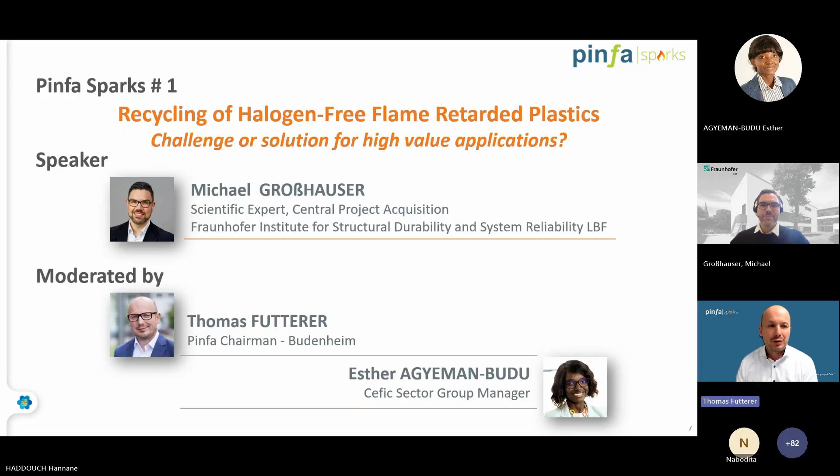Before we start, let me give you a short introduction to Pinfa. Who are we? We are the Phosphorus Inorganic and Nitrogen Flame Retardants Association, established in 2009 as a sector group within CEFIC. This association represents 26 members, including manufacturers and users of non-halogenated flame retardants. We also have Pinfa North America and Pinfa China as sister associations, and a global network of institutions and companies who support Pinfa and the members.

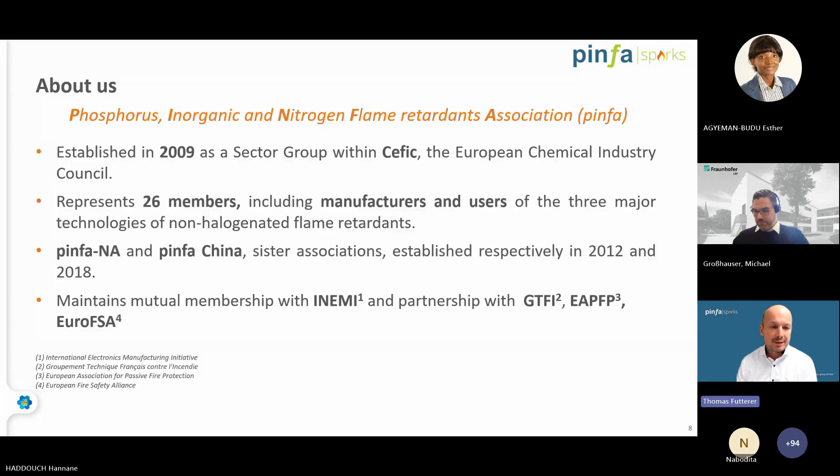We at Pinfa represent the phosphorus, inorganic and nitrogen-based technologies which enhance fire safety in materials and plastics. That's the topic today: plastics, but also textiles, foams, and electronics. These flame retardants contribute to reducing flammability and lead to a slowing ignition process.

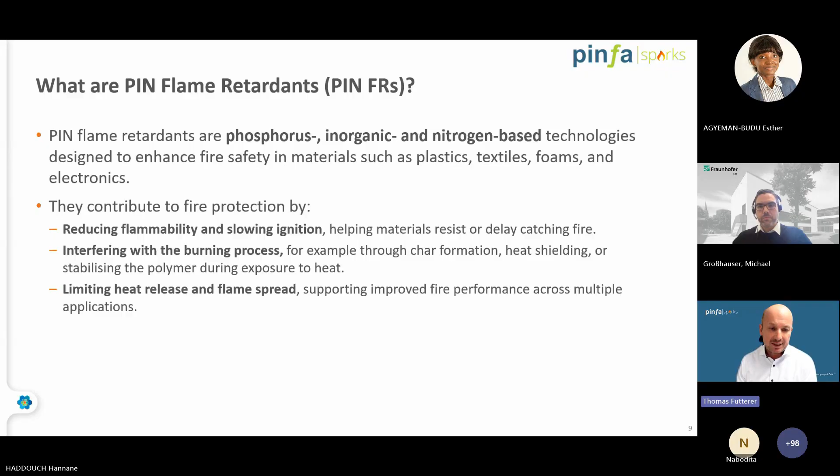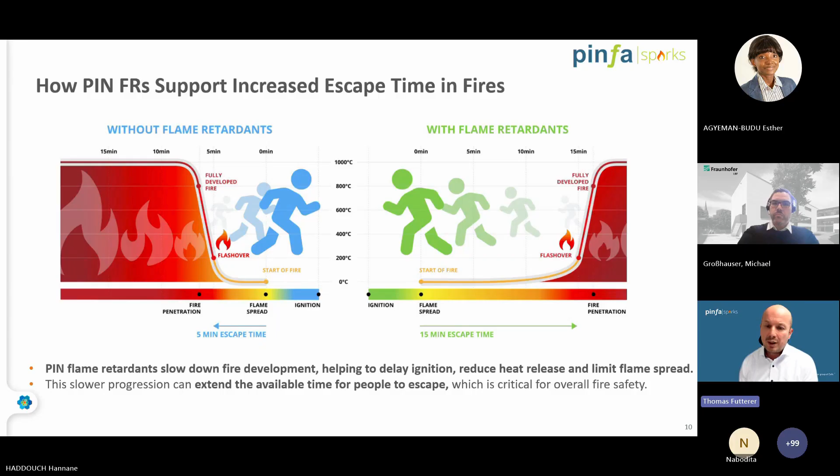Here you see the contribution of flame retardants on the right part of this scheme. With flame retardants, you gain more time for firemen, time for escape, time until the fire develops fully. So with this functionality in materials, you are able to save lives and goods.

What are our members' shared visions? The vision is to continuously improve the environmental and health profile of our flame retardant products, offering innovative solutions for sustainable fire safety. We are committed to maintaining high fire safety standards across the world and minimizing the risk of fire to the general public.

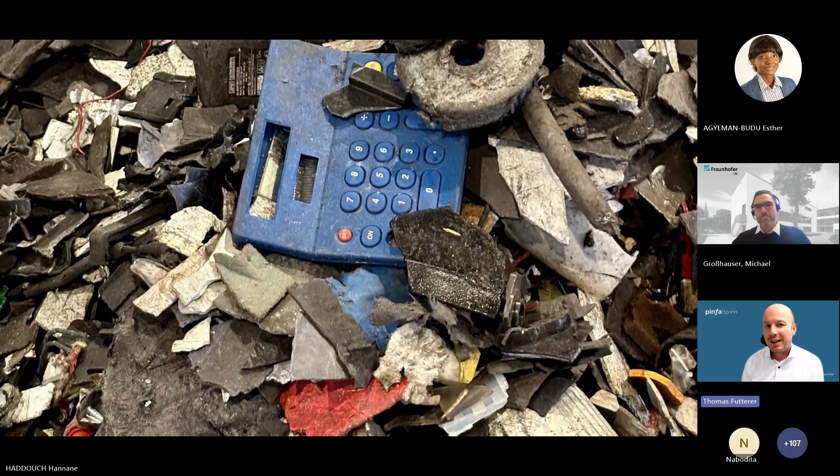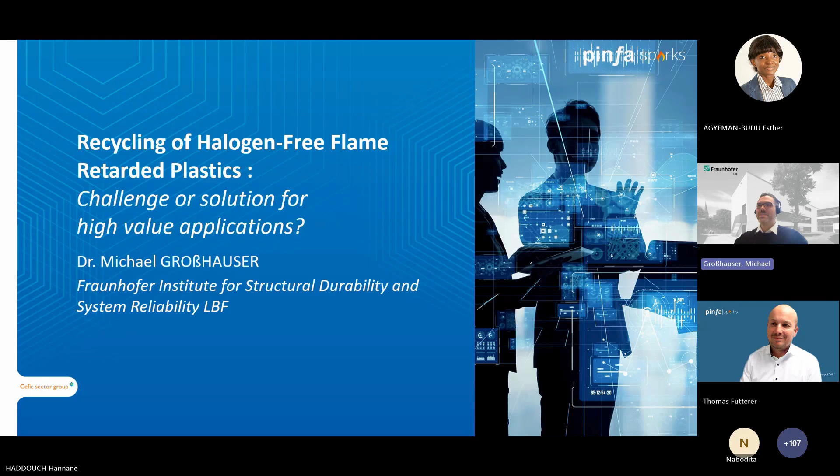Michael, it's now your stage. You're the expert on recycling, the expert on plastics recycling and plastic materials. So the stage is yours. Thank you, Thomas, and thank you for the possibility to speak to all of you here. Today I want to give you an overview about the recycling of halogen-free flame-retardant plastic, and especially on the last 10 years of cooperation between Pinfa and Fraunhofer LBF.

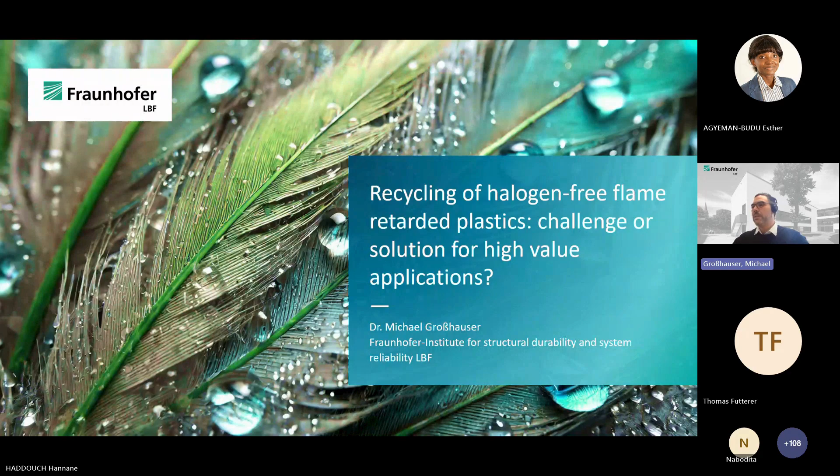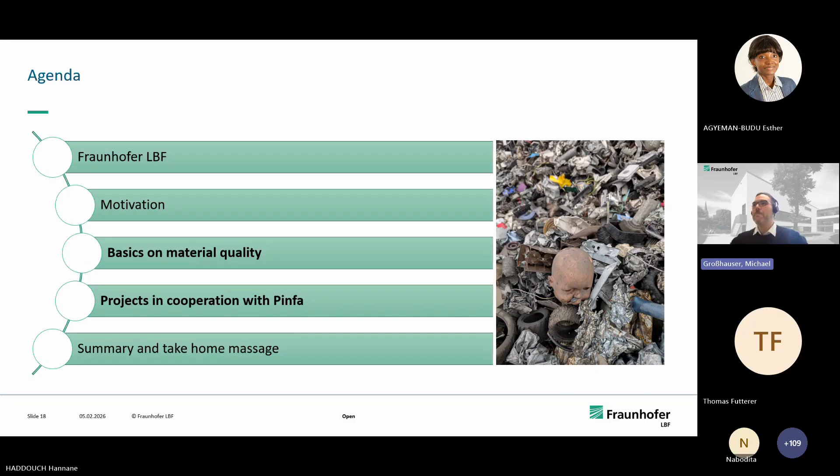The next slide: Fraunhofer LBF. You see the nice picture of the building, but yes, there's the Fraunhofer organization as a whole—all the institutes, all the employees, the whole financial volume, the funding, and everything. So if you don't know Fraunhofer, just reach out to me or my colleagues and we will tell you more about it.

All over the world there are several Fraunhofer bureaus. So if you are from somewhere and see there's a bureau next to your place, reach out there, or reach out to us in Germany, and we can direct you to the ones overseas.

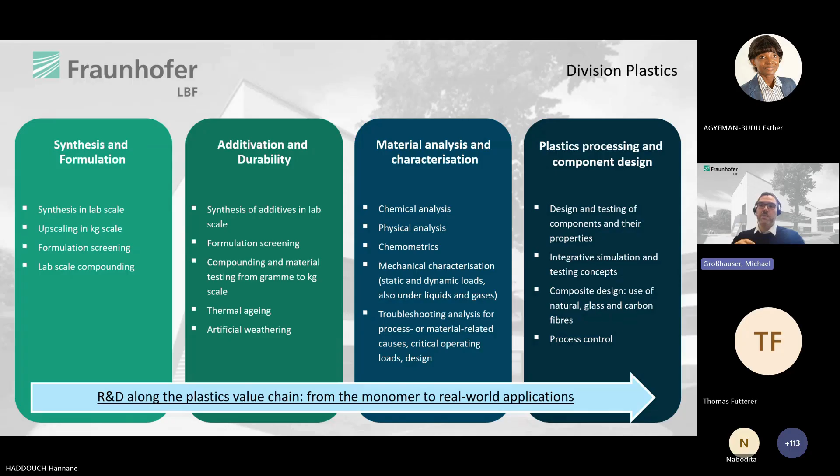From my side, as part of Fraunhofer LBF, the institute in Darmstadt, we focus on plastics along the value chain—from synthesis and formulation in the beginning, over additivation and material analysis and characterization, to the final plastic processing and component design. So if you have some ideas or needs, reach out to me or my colleagues at Fraunhofer LBF, and we could help you or direct you elsewhere inside the Fraunhofer Society.

Also, these pictures are from the visit at the recycling plant, and I will go a bit more into depth about the motivation. Why are we doing those projects together, and together with Pinfa also?

Next slide, please. Just to give you an overview, our European framework is quite complicated, and I don't know it in detail, and I don't know if someone knows it in detail because it's so complicated. But I wanted to do this slide a long time ago because it gives you an overview. Let's say 1973, that's over 50 years ago, so half a century. And you see in the beginning, it was lots of decades which was just about what's waste and how can we look into that waste not being dumped anywhere, and there's a regulation about waste.

It's going up to 2000 with the first things about what do we do with end-of-life vehicles. And after that, after the beginning of the 2000s, up to the 2010s, there was a clear transition toward a circular economy. How can we improve circularity? How can we make the materials we use more sustainable? And so, let's say from 2019, it's really a targeted focus on plastics and on recycling rates, and how can we go from that point to give products a more sustainable footprint, not just sustainable in itself, but also on the side of where the sources are, to keep the sources inside of a circular economy in Europe.

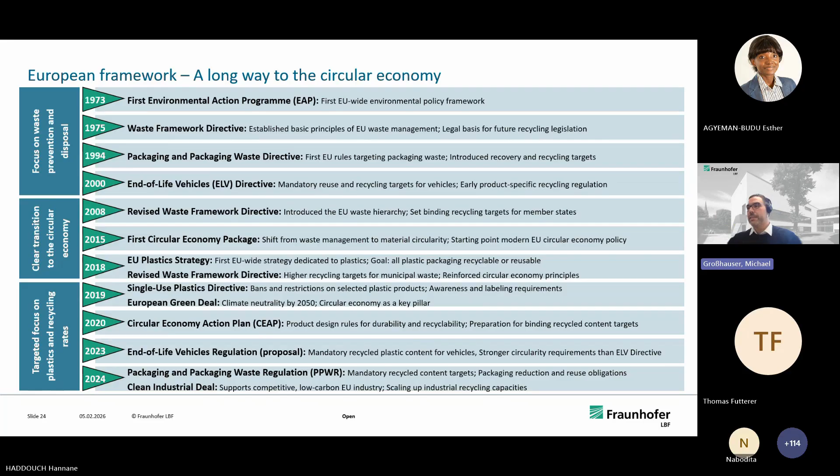And the next slide, please. Just to give you the growth of the recycling industry. So we see in the last 10 years there was an increasing capacity of recycling. There's a huge number of companies, 850 as of 2024. The numbers are from Plastics Recyclers Europe. You can all see them on their page. It will probably be updated in some weeks or months.

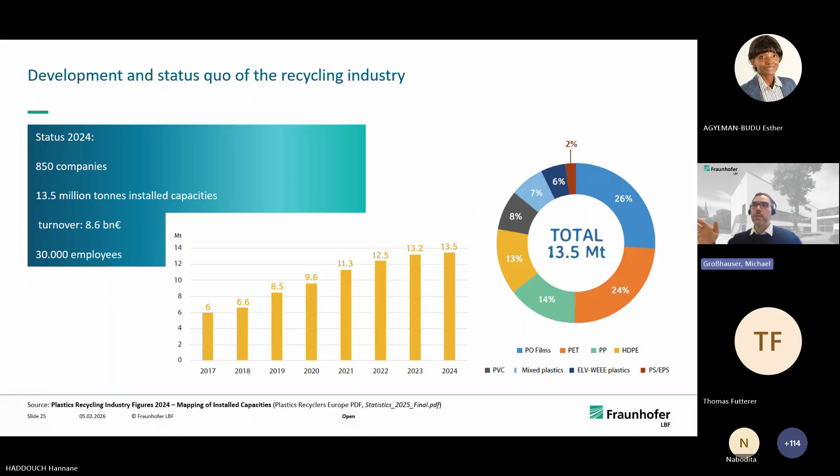But you also see that in the last years there was a bit of stagnation. And this relates to some topics I will go into later, but there are some topics in the market and things we also have to consider at some point. But you also see a lot of materials are getting recycled, and there's a lot of material coming back, and the possibility is there. There's also a big turnover in billions of euros, and about 30,000 employees, which is quite big too.

Next slide, please. And this is what I meant before. There are several topics. When you look into the media somewhere, there are stories about Europe losing recycling capacity despite rising regulatory demand. The problem is not a lack of potential, but a lack of viable market conditions, because recycling plastics takes some effort, and this effort must be considered in the price afterwards. This could be some problem, also compared to very low international virgin market prices.

And we have a lot of high value plastic streams that remain unexploited at the moment, which has some big potential. Policy at the moment is itself quite complicated, and market reality is struggling against it, so they are misaligned at some point. But what we need to keep in focus is that Europe has the feedstock, the technology, and the knowledge to scale up plastic recycling. But without stabilizing markets and unlocking the high value, this potential will remain unused at some point. Next slide, please.

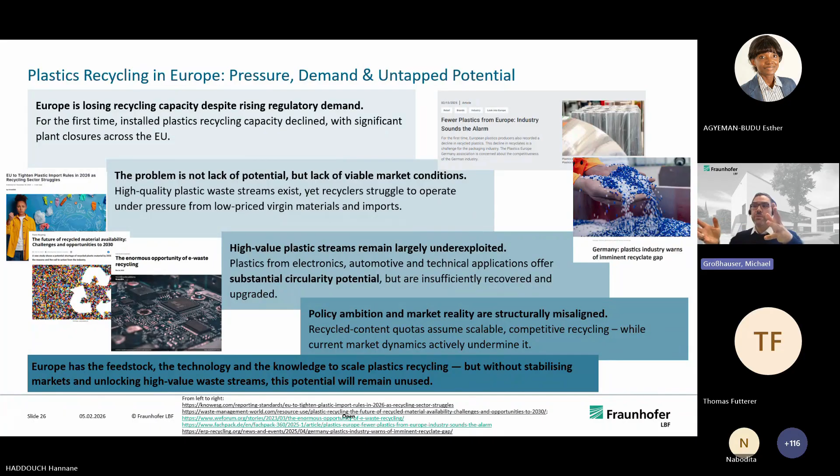Just to give you an overview, in the past we used the left part, so we went from virgin plastics to flame retardant products as state of the art. So we produce plastics, we compound them in compounding steps, and we get the flame retardant compounds or products from that. So what are the possibilities to get more sustainable?

We could use post-industrial recyclates or post-consumer recyclates, but the sources are sometimes very diverse. As I said before, there are some sources that exist but are not used at the moment. On the other hand, it could be bio-based feedstock, which I will not go into depth on in this presentation, but there's also some possibility. We could use PLA or drop-in solutions for some things, which could be used.

And finally, regarding the quotas that are coming up, closed loop solutions are a big point. Especially if you look at sorting plants, they say they cannot sort for every kilo, for every material. But if we could have closed loop solutions for specific applications, this could be a solution to get materials back. Next slide, please.

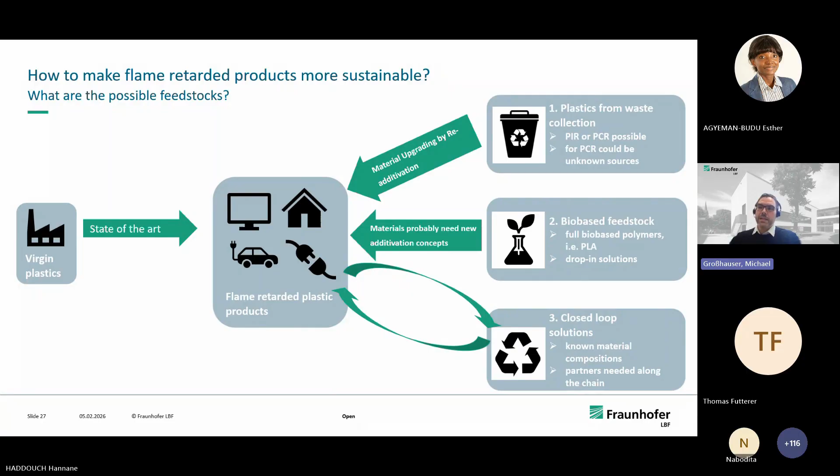The way we go today is we put a lot of effort, money and energy into a base material. We increase the material value as it rises to a product, and in the end, after we use it, it goes to incineration. A lot of flame retardant plastics especially go to incineration afterwards because they cannot be sorted in detail.

So that's what I meant before, because we could use closed loop materials. Just to give you a number: 5 million tons of technical plastics end up in waste streams in the EU every year. A large share of this is incinerated - you don't find exact numbers how much is used for that, but probably the most part. So there's a lot of material value that gets destroyed.

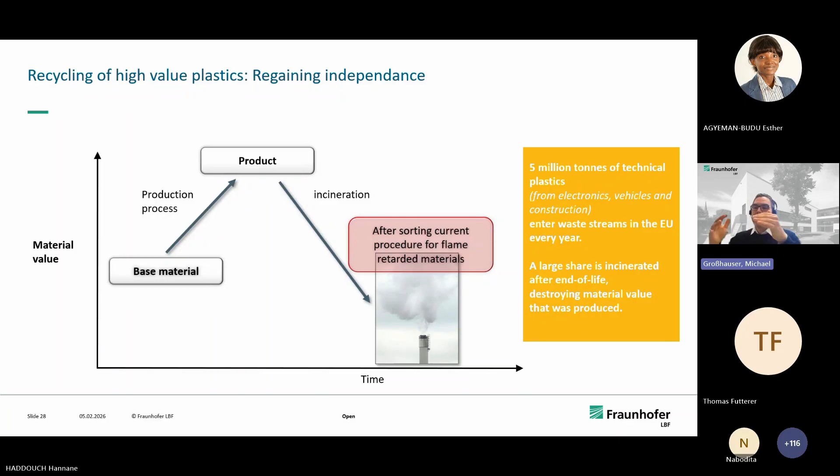What we want, or what would get us closer to the goal, is to enable a longer lifespan for flame retardant materials by reusing them. We increase the value through material recovery back into a product again, so we keep the high material value in the loop. This represents a major circular opportunity. We need targeted recycling, material upgrading, and R&D to transform these into high value products in the end. Innovation unlocks the value, instead of just waste incineration afterwards.

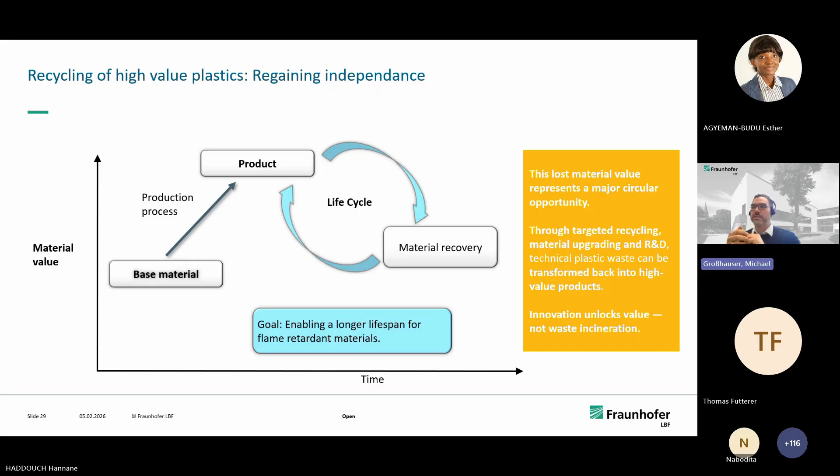Next slide please, just to give a bit of overview on material quality basics. I want to give a short overview because some people don't get the difference at some point between virgin, post-industrial, and post-consumer recyclates.

From left to right, virgin plastics are produced from raw oil through distillation and steam crackers, and go through manufacturing. There is some loss in manufacturing, and products that don't get to the market can go back as post-industrial recycling. There's also a large amount of material that is not used at the moment - this could be a potential for bringing more material back into use.

But also afterwards we have a consumption phase, because everyone - you and me - uses plastic packaging, technical products, cars, houses, everything. There's plastic in there, especially high value materials. After the lifetime of the used product, we get post-consumer plastic, which becomes a secondary raw material. But we need a recycling step afterward to get it into a usable post-consumer recyclate, and this step is sometimes a bit problematic, as I said before.

The big difference between the left part and the right part is the homogeneity - it gets more diverse, really heterogeneous, from left to right. We know exactly what happens to a virgin material when we process it, but we do not know at first glance what is going on in a post-consumer recyclate, because we don't know what impurities can come inside. There are no external influences on virgin materials, but many influences on post-consumer materials from external sources.

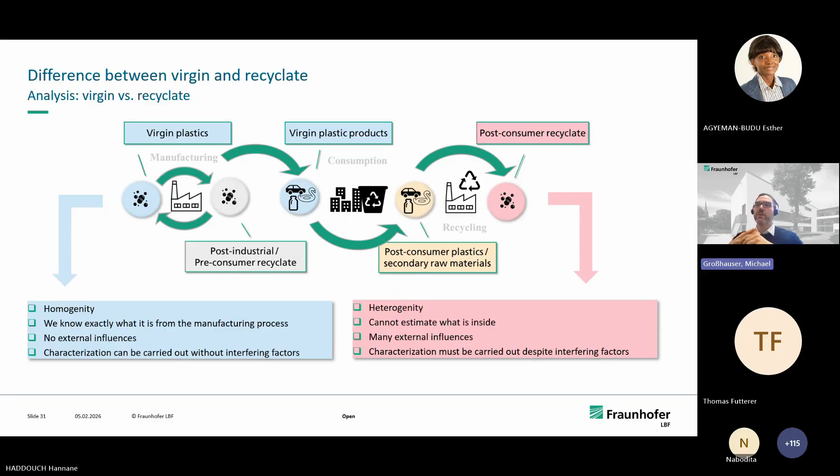Next slide please, just to give an overview of what challenges come up. There are fluctuations of the materials, degradation of the polymers, and odor issues. Everything that degrades or changes during the lifetime - oxidizing of plastics or something else, or additive fractions still inside some materials - contributes to odor, for example.

Some things can leave the materials afterwards. Compositions get renewed - in a recycling process you get really different materials coming together to form new compositions, along with all these impurities. This is something you have to tackle at some point.

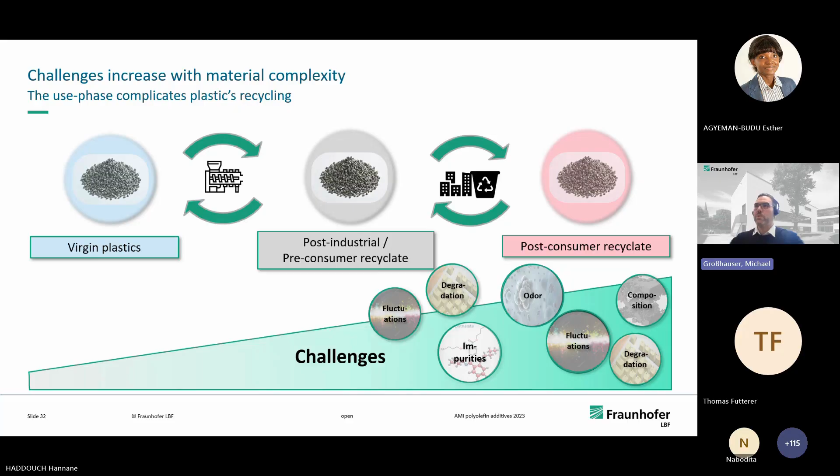Next slide please. There are some things you can do just for thermoplastic polymers. On the left side, restabilization is key. For example, you can enlarge and elongate the lifetime and recycling stability with new restabilization - this is all things we've done at our institute with several materials.

Compatibilization is a big topic too, because you have a lot of blends in PCR materials, and also blends between, let's say, aged materials and new materials sometimes. So you have to work a bit to bring those materials together, and this is composition dependent, of course.

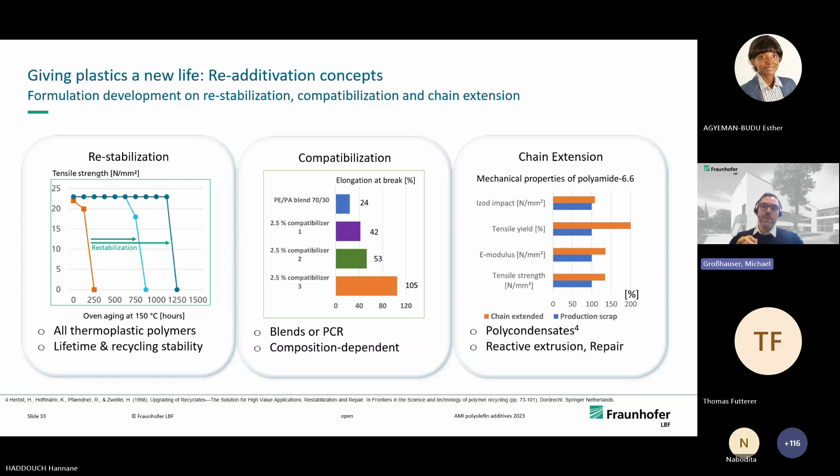And in the end, of course, if you have polycondensates, you can always do chain extension, and repair the materials to some degree. This is quite a smart move to do at that point. Okay, thank you, and next slide please.

I want to now go into detail on the projects in cooperation with Pinfa and the Pinfa member companies. It all began over 10 years ago with the recycling of halogen-free flame retardant plastic. So it's a big topic, but what did we do there?

It was a model-based project with a scope of systematic investigation of 10 HFFR model systems. You see them on the bottom left side. It was also quite well accepted from media.

So we did some publications there because there was interest all over the industry, because the basic investigation was: if we have flame retardant plastics and we do a simulation in this field, what's happening when they get recycled? What's happening if they age and you want to reuse the material afterwards? We started to do that in a simulation way, so we know what we put in there from an energy side and from a processing side.

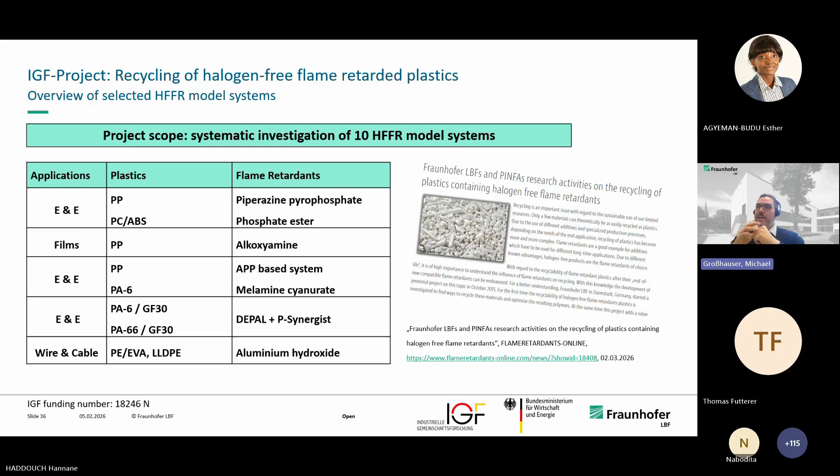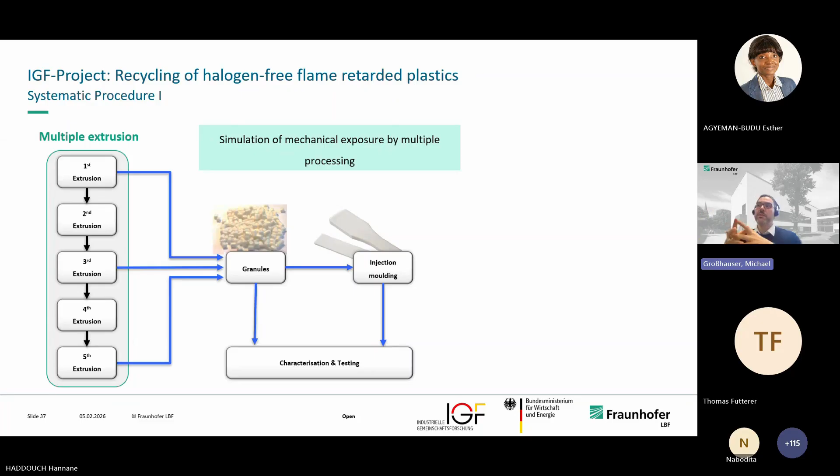Here you see the first systematic procedure. We did multiple extrusions to look inside the material, what's happening if it will be reprocessed. We took out material from the first extrusion step, the third extrusion step, and the fifth extrusion step. Then we got granules out of that, made characterizations and testing out of the granules, and also did injection molding and tested those injection molded parts.

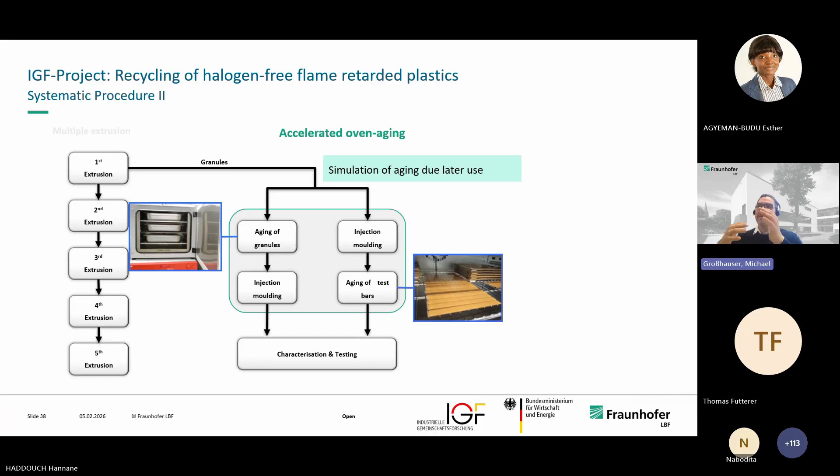So we had several results here. From multiple extrusion, after the 5th extrusion step, flame retardancy was maintained for 9 out of 10 formulations. The 10th one was not going that bad, just a small degree off the most optimal possible way.

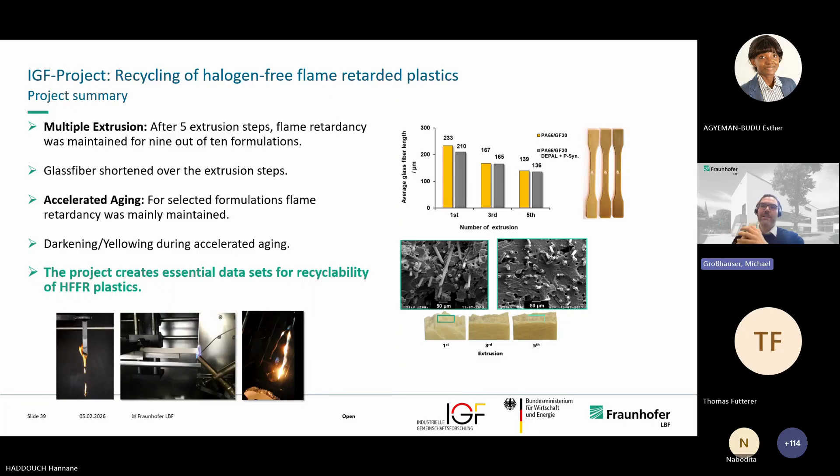We used several flame retardance testings, you see that on the bottom, and the essential data sets show that the recyclability of HFFR plastics is possible.

And after that, there came COVID-19. There was always a bit of going around asking, what's the industry doing? We focused together with the companies of Pinfa and partnering companies on what can we do. We came together in an industrial joint project to look for real recyclates that are in the market.

In the beginning of the 2020s, it was kind of hard to get real PCR materials and PIR materials. At some point a lot of materials were sold out. And we looked at the tailoring for HFFR performance of recyclates.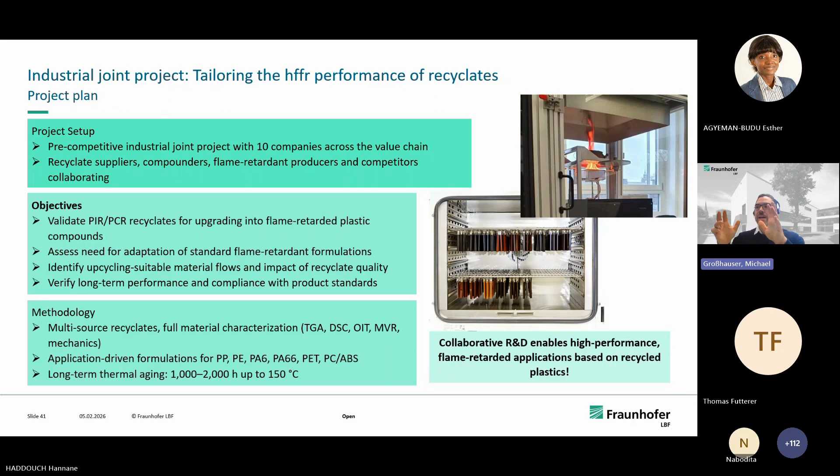So we used multi-source recyclates and did a characterization with the methods you see, and we have application-driven formulations we did together with the participating companies for the materials you see down there, and also thermal aging from 1,000 to 2,000 hours up to 150 degrees. This collaborative R&D method enabled high-performance flame retardant applications, which are basically doable based on the recyclate plastics.

Just to give you an overview: the material types we looked into inside of this project, the applications that could be done with those materials, and the sources we evaluated for this project.

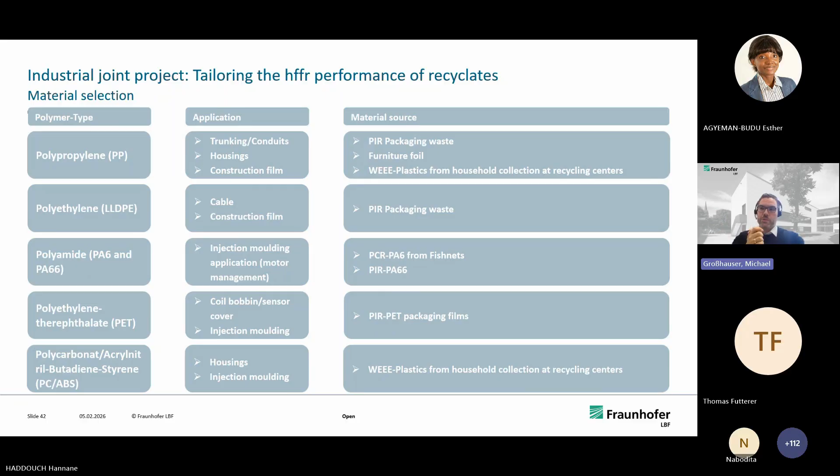This is not a project methodology, it's the results. Just to give you a glimpse, there are so many, it's like a big report we had there.

GWFI and GWIT were done, and they reached really good values: 850 degrees and 800 degrees GWIT for PA66, and 960 GWFI for PA6 and 6.6. CTI at 600 volts was reached for PA6 and 6.6.

We also did cone calorimetry, and it also showed really stable materials, reasonably stable values for the time to ignition, time to burn, peak heat release rate, total heat release rate, and the maximum average rate of heat emission. And for almost all the recyclates we did, there were some materials that ran out of scope. But also here, similar to the first project, the problem was most of the times the polymeric quality.

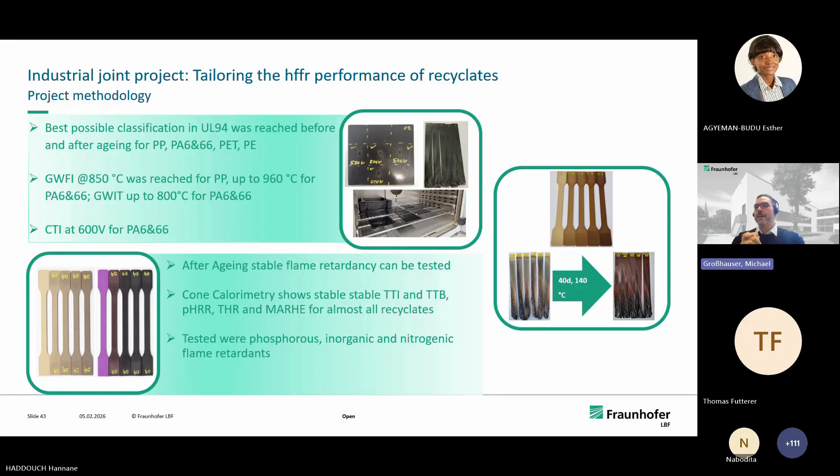And then there's another project, public funded, on the upcycling of halogen-free flame retardant materials. This started last year. What we are doing there is looking at specific waste streams that are at the moment not used for high value plastics and can be upgraded - that's the main question we try to focus on in this project. We also use untypical recyclates like mixtures of PE, PA, or HDPE from multi-layer films and so on, to get a possible new application out of them.

And we're doing intense analysis, which is possible for a public funded project, to give the industry afterwards an overview. Just to give you a short overview, we got over 30 different recyclates from different sources and different materials. We procured them, we have them in our house right now. And we are currently compounding typical flame retardant formulations for each, up to 10 for each recyclate type, to give a broad overview and see how the characterizations in the beginning probably interact with the final results of the flame retardancy, and see if there's something that plays into it.

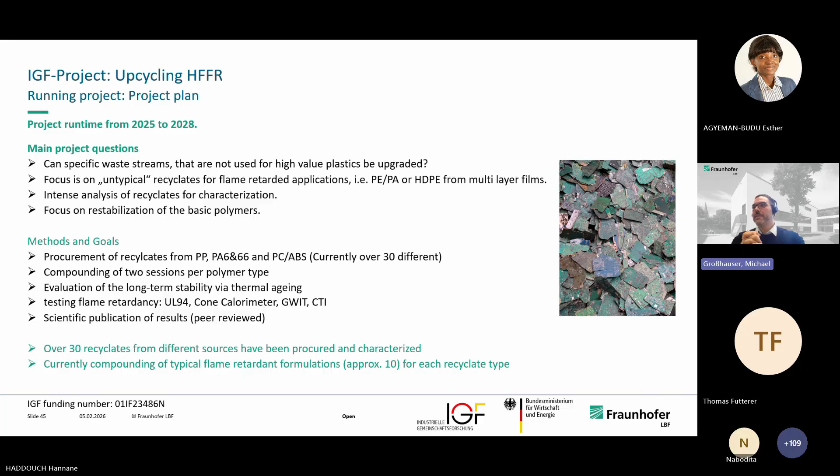So I will come to the end. I think I'm in time, I don't need to hurry the end. So I will summarize a bit. So what did we learn? What can we take with us?

So recyclates have a large variety, so characterization is necessary therefore. The properties can reach really different performances. And what one can take with him or her is the halogen-free flame retardants - they perform in recyclates similar to virgin materials. But of course, the recyclate quality is something you cannot just buy any recyclate and say I will use my formulation, because especially impurities need to be worked up and can work antagonistically.

Not every recyclate type is suitable for upcycling. We found out that some of the recyclates are on a really nice analytic perspective, but they are not usable for long-term stability and not long-term stable applications. And you need to fit formulations at some point after you have characterization of your materials. And sometimes it's not possible that they fit because the variation is higher.

So one needs to think about - everyone who wants to use recyclates - are the specifications I use suitable for recyclates? And to get deeper in the knowledge for the characterization and analyzation of the waste streams, we need to carry out broader studies. We also need to know what happens when materials come back, as I said in the beginning, with closed loop systems, and also after especially long-term usage time. A lot of topics regarding interactions between additives, flame retardants, fillers are still unknown and will be handled in future projects, hopefully not just from our side, but from all over the other research institutions. This is a very complex question, and we need more cooperation between every player along the product value chain.

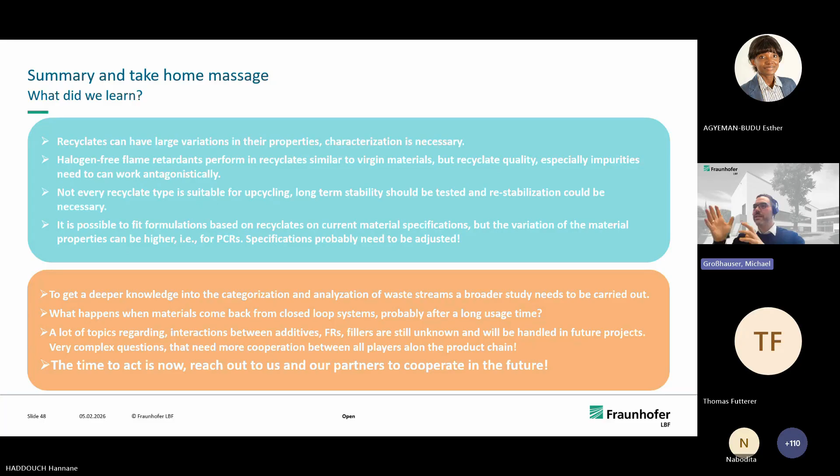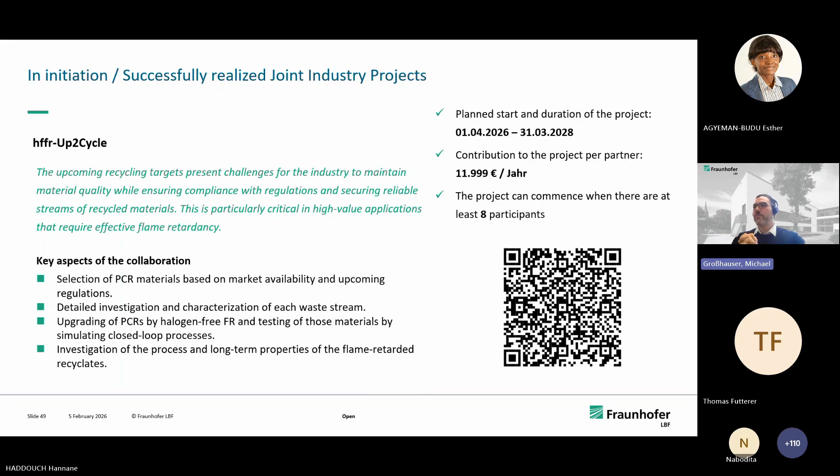I want to give you the opportunity to take part at the next industrial joint project, which will start this year, which will focus on post-consumer recyclates, how they can be upgraded, and also how they work in a closed recycling loop, and therefore HFFR upcycling. Of course, feel free to reach out to me, or Pinfa companies.